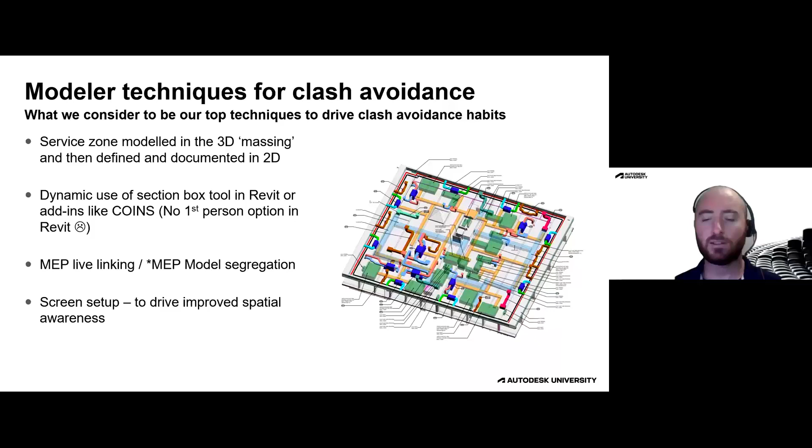We did an interesting exercise, which I'm about to show you, to drive improved spatial awareness when people are modeling. I think this area is definitely something that can help with clash avoidance.

So we did a bit of a fun exercise with the team recently. We asked them to do a screen selfie of what their screen real estate looks like. Not the hardware, I'm not too concerned about that, just want to see how people are laying stuff out on their screens, and whether they're doing it in an effective way to be productive. But also, do they have a coordination mindset or approach that allows for better spatial awareness as they're working, and good spatial awareness of what's happening around them in the model.

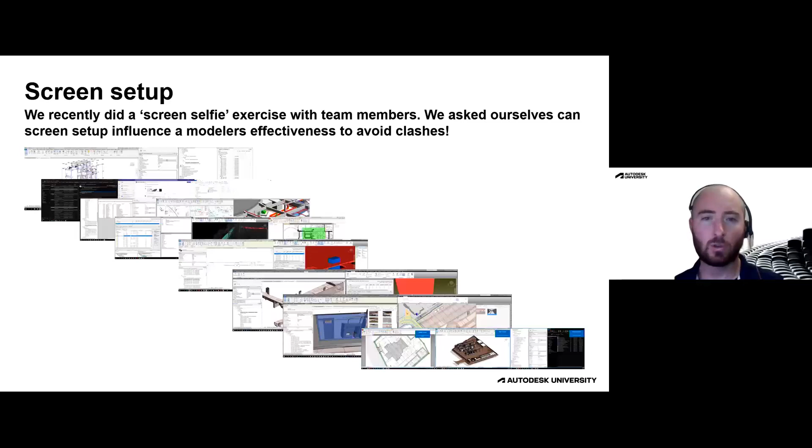One of the key themes we picked up was that a lot of the guys had more than one screen. Everybody sent either 2 or 3 screen options. I felt a little jealous, I've probably got a bit of a lack of a good screen setup at the moment, looking at some of the teams' combinations. But one of the main themes we saw was in a 3-screen process, as an example, which is on the screen now.

Teams were grouping a theme on each screen. In this example, the person had reference material on the far left - unfortunately it's a PDF, so maybe that's not the best example. In the middle, he was very clear on his approach to his modeling space - it's his primary modeling space.

The teams were very clear that they like to use Revit tabs and have a couple available to jump between, so GAs and a good 3D view. They were quite vocal about not liking tiled views, saying it gets messy and isn't that helpful, which was interesting feedback. Then the last screen is tools and files - you can see they've really extended out their tools panels to see information and data, and they're also looking at a couple of files.

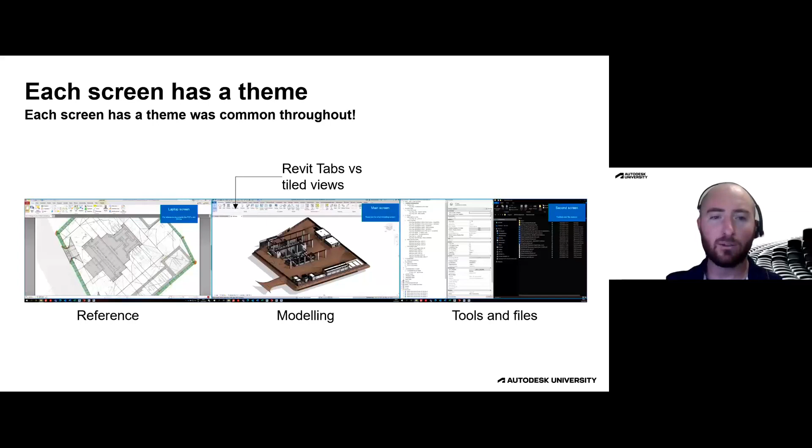The next trend we saw, and this is what I was hoping to see, is a combination of authoring tools and viewing and coordination tools. You can see the user's got his tools for authoring and modeling open on the left, and a viewer and coordination tool on the far right - Revit on the left and Navisworks on the right. That was really what I was wanting to see, and I think we generally saw that as a bit of a trend.

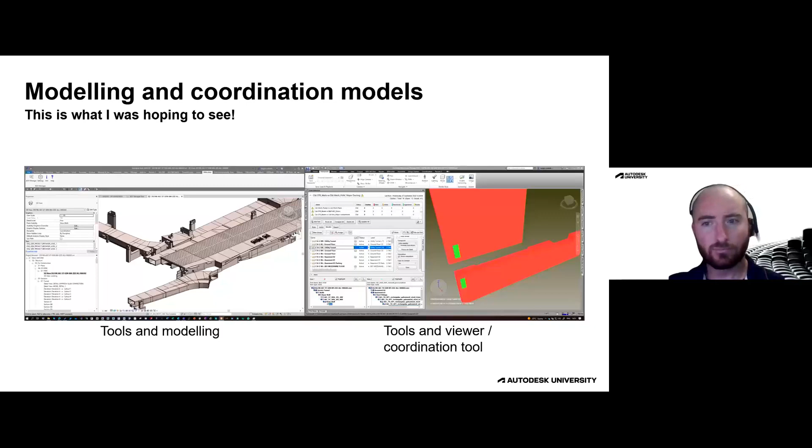The last option that one of the users came up with was quite advanced, at least to me. He didn't have 1 screen option, he had 3. What he does is use the Windows task view to customize desktops - he comes in every day and customizes desktop, very organized about how he's dealing and toggling between different desktop options.

So you had a 3-screen setup for communication, for modeling and drawing, and then coordination and modeling. Quite a more detailed look at how screen layout works, but I definitely felt that this user had very good spatial awareness around how he was working, and I believe that would lead to fewer clashes, or at least him causing fewer clashes.

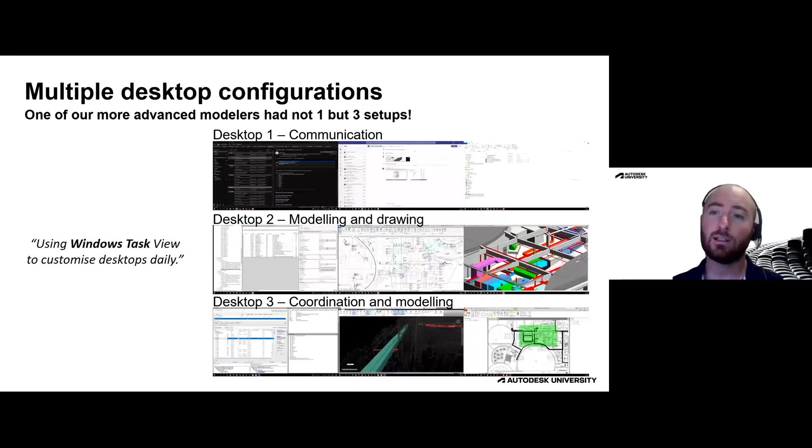All right, then jumping into clash standards and processes. Before I get into clash standards themselves, I think with BIM 360 and ACC, information flow is really important. The tools are quite simple - you have carte blanche in some ways of how you can set folders up. You have to have quite a strict, or at least a good understanding of how you want information to flow within BIM 360 and ACC, and that relates eventually to how you do coordination, design review, or clash detection.

So in this setup, you'll see that I've got all the different modules listed on the left. We've got document management, design collaboration, and model coordination. And then we have our dashboarding, which is obviously external at this stage for us through Power BI. And then we've got a very distinct approach to how we deal with Revit models and how we deal with...

Say, Navisworks models within the work in progress state, shared, published, and archived in ISO 19650 terminology. So the takeout here is just understand what you want your information flow to do for you. Understand how the different modules can allow you to move information in different files from one work state to another. For example, with work in progress, we will use design collaboration to move information into the shared area. When we move information from the shared area to the published area, we'll use review workflows to move that information across.

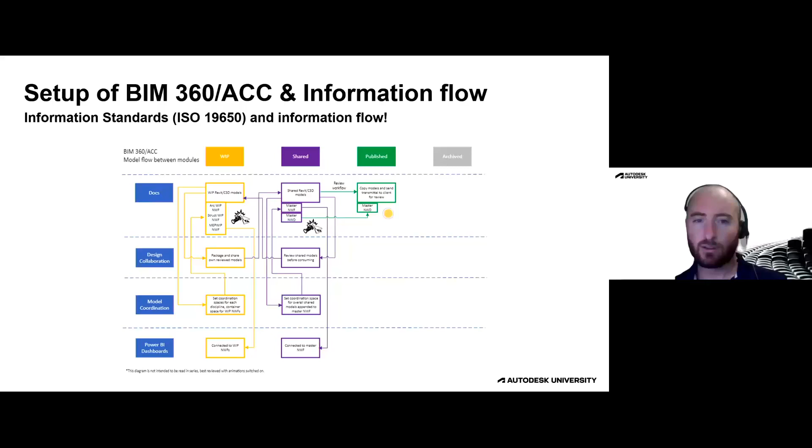Then diving into our actual clash detection standards, we've actually overhauled them a little bit recently because features are changing quite rapidly around us and tools are advancing, and we've had to go back and refresh our approach. So looking at that approach, we looked at 6 different key things around clash detection.

The first one was, how do we access federated models? We obviously now got the option with model coordination to have the models located on the cloud, and we can point Navisworks at those models on the cloud. That's a huge advancement to how we used to work with Navisworks.

With clash detection tests, we'd sort of gone down a route where we had themed clash detection tests, and we had lots of clash detection tests, actually over 300 different tests that we would use as a standard, and we sort of felt that we were starting to trip up over that standard as we tried to scale it out.

Clash grouping, you've now got a clash grouping tool within Navisworks. Definitely you had third-party add-ins that did that previously, but that kind of changes the landscape a bit around how detailed your clash tests need to be, because you can now use clash grouping to really get some granularity in your clash tests. The next one is team engagement.

Keep it simple type approach. Roles and responsibilities is always a thing when it comes to coordination and clash detection. It's not the BIM manager's role to do clash detection, or at least to solve clashes. It's the design team's responsibility. Yet we often see the BIM manager doing some of those tasks, or at least getting a little bit more involved than what they should.

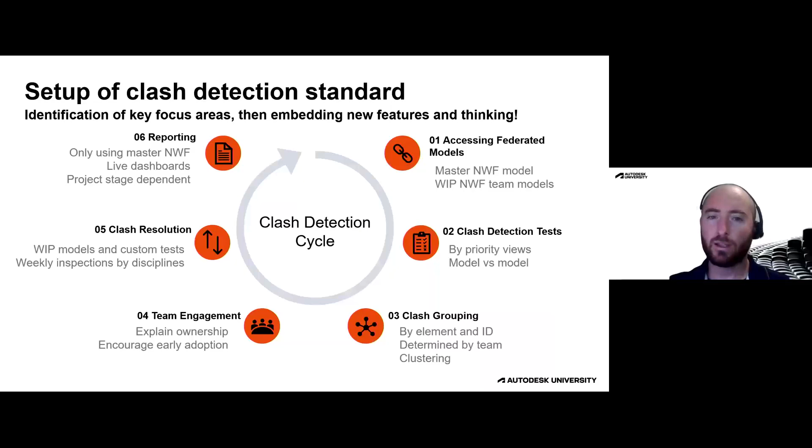So then we took those key focus areas, and we embedded some of the new features and some of the new concepts that we wanted to apply. So, for example, for accessing federated models, master NWFs and work in progress NWFs on BIM 360 or in model coordination, really nice new advancements. Clash grouping, we got the clash tool. So we went and embedded those different features onto this layout. I won't go through all of them now, but that was kind of the way that we processed the information to work it out.

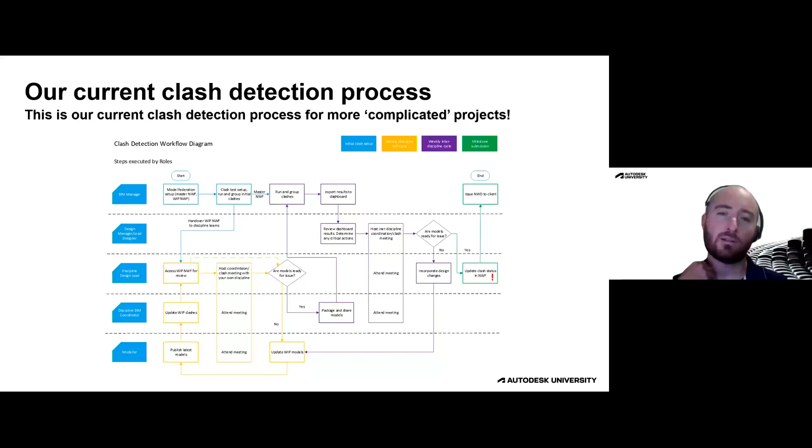So, the lessons we've learned so far with model coordination and Navisworks: publish times can take a while. We've had a few challenges with publish times, so just allow for that in your workflow and process. If somebody publishes a big model, it's not going to be available instantaneously, so you need a process that's flexible to work with that.

The next lesson is: do not publish sheets if not completely essential. That might be controversial to some—the fully integrated approach would be to publish your Revit model and your Revit sheets, and do review on that model and those sheets. I think for small to medium-sized projects that's suitable, but for very big projects, or ones with complicated model setups, we find the time to process sheets slows things down and becomes counterproductive. So if you don't absolutely need it, turn your sheets off and your publish times will be faster.

Then, turn off clashes in model coordination. You now have the feature to turn this off—if you're doing clash detection in Navisworks, turn the model coordination clashes off. It'll help with processing time into model coordination. That's another key thing we've found.

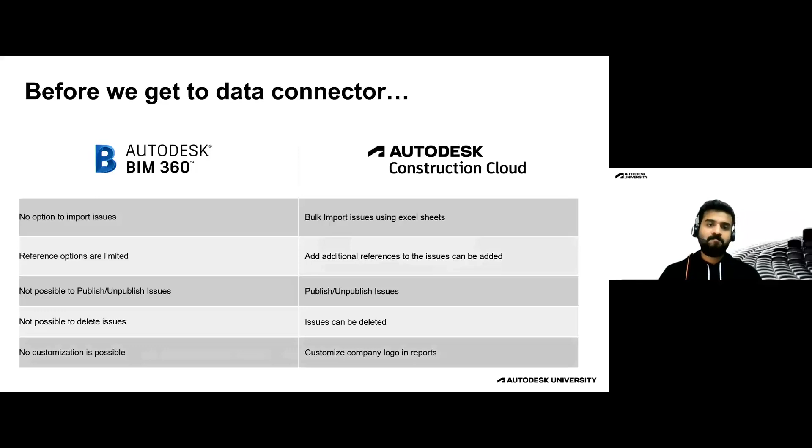With that, let's discuss the in-product reporting from Data Connector. If you need to customize the information and create your own business intelligence dashboards, you can also extract the account level or project level data from the ACC project with the help of Data Connector. Data Connector offers you the flexibility to analyze the data using your own BI tools with a low level of code integration. Currently there are two ways by which you can extract the ACC data using Data Connector.

You can either download the CSV report to your local system and capture the insights, or directly in Microsoft Power BI, with the help of the certified Autodesk Construction Cloud Connector, you can get that data and create your own BI dashboards. Once you have integrated the Data Connector in Power BI, you do not have to worry about data sync, as it will automatically sync the data based on the sync frequency that you have set in your Autodesk Construction Cloud project.

And if you need further customization in Data Connector, then with the help of the Data Connector Forge-based API, you can do it.

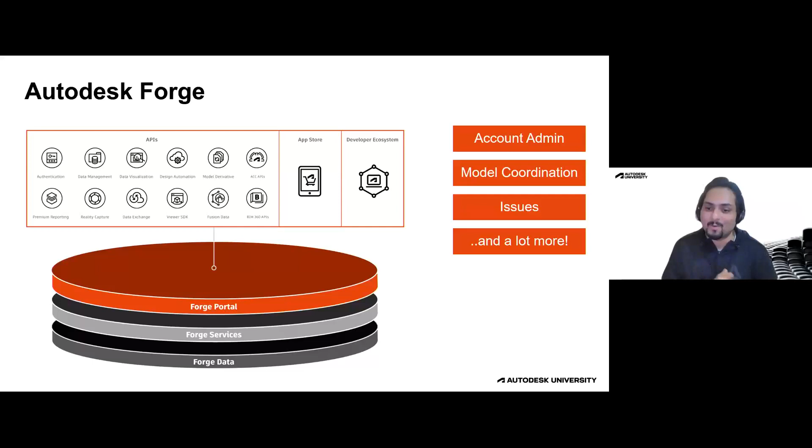Now, coming back to visualization, some of the relevant APIs for us in the context of reporting and visualizing clashes were account admin, model coordination, and issues. The model coordination APIs provide information around coordination spaces, models, views, and clashes.

Now, creating something like this does require a bit of programming, database, and Power BI skills, but in the long term, the gains could be worth it, if you have many projects using standalone model coordination.

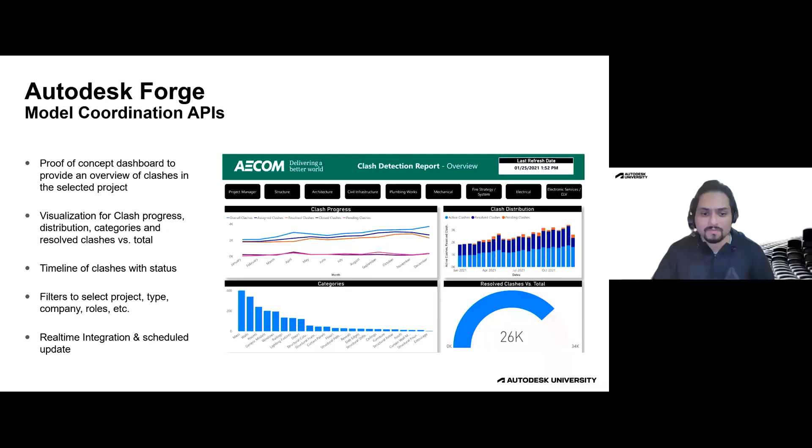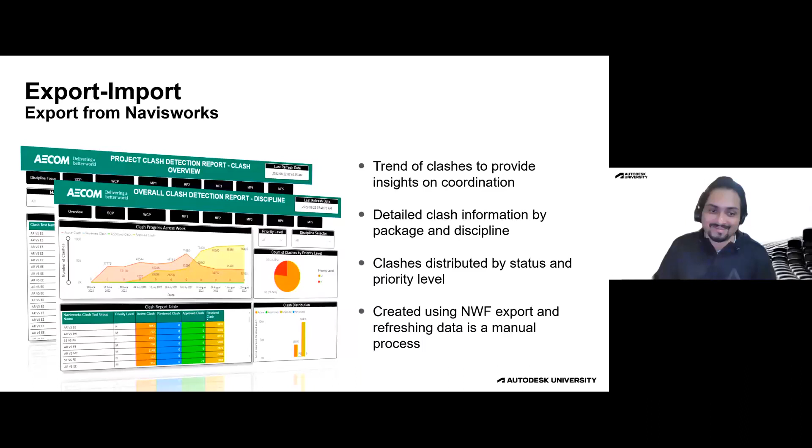This is something that requires human input and is a manual process. Let's get on to the next slide to have a look at the secret recipe to build this. Well, not a secret anymore.